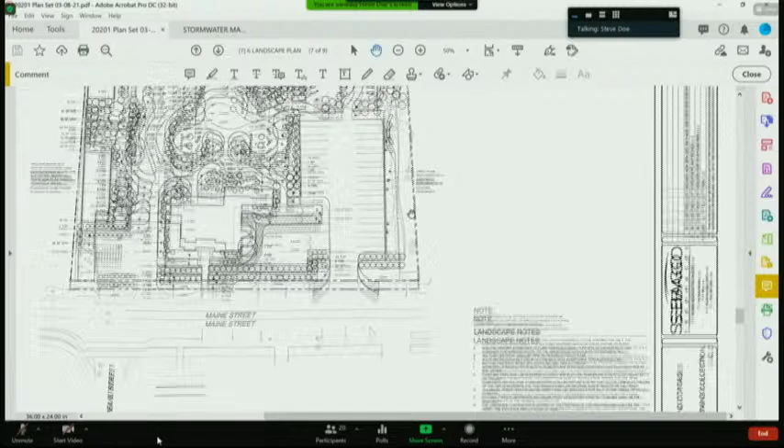This neighbor over here, I think, was also concerned about the parking lot. Currently, there's several large shade trees on this side. This one and this one are two very large Norway maples, or Norway spruces. Our original plan was to just keep the existing vegetation in there. If they have concerns about the views, I had talked to Rob, and he's willing to either add some additional screening, whether it's in vegetation or a fence.

I think if we put a fence in, we'd probably want it to run along this line just to the edge of the parking lot to screen those vehicles from their view.

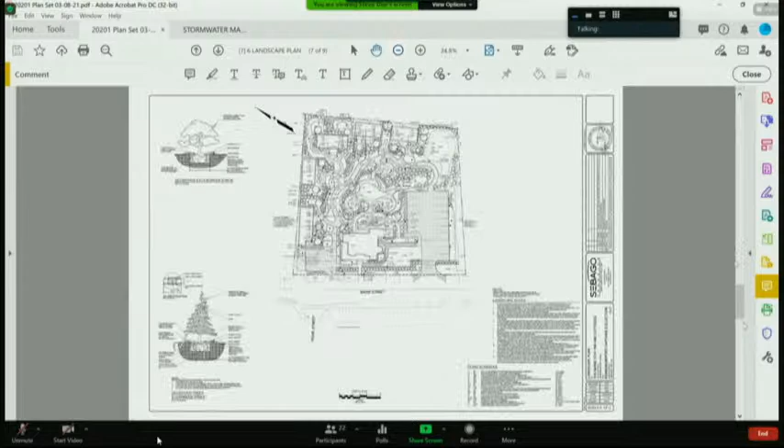The only other thing I want to discuss is our parking calculations, based on... I think I'll go to sheet 1. Zoom out a bit. The site plan has the parking counts.

So the parking count existing on site is 18 spaces. We're required 1 space per sleeping room. There are 17 sleeping rooms, so that's 17 spaces. 4 employees, which at 1 space per 2 employees equals 2. So we're required to have 19 spaces, and we don't have 19. We have 18, which is what's existing on site.

So we'd be asking for some leniency on that if we could keep the 18. To get to 18 would require additional tree removal, and we really would hate to do that. The only place we could add parking would be back in here, and there's some fairly large trees in this location. We really would not like to remove those if possible for that one additional space.

So that's all I have to update you. I'd be happy to answer any questions the board has, Steve, on this.

Steve, this is Ed. Can I jump in on the parking? You say that there are an existing 18 spaces, right? Correct. Didn't that include the street parking? It did not. Ah, okay.

I think there's an argument to be made here that as this is a grandfathered installation, the number of spaces that needs to be met is what was already there, not necessarily how many are calculated per the land use ordinance algorithm, if there's a difference between the two. You had 18 before, I think you need 18 now. So it would be listed as a non-compliance that's grandfathered, that they're not making any worse. That's what I would offer.

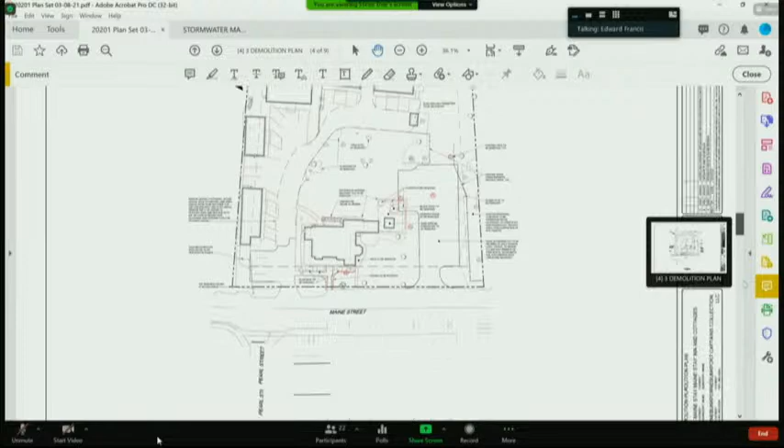Okay, my biggest question is item 7.7D: the total area of motel, hotel, bed and breakfast buildings, plus total area of parking spaces and driveways taken together shall not exceed 1/3 of the total area of the lot in the case of single-story buildings, nor exceed 1/4 of the area of the lot in the case of two-story buildings. Now, this is multi-story - the one building is multi-story.

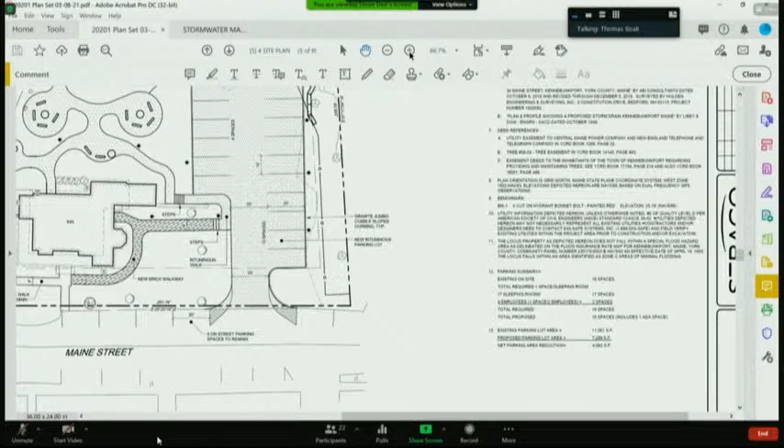So I believe it really depends on certain things, but I did some rough calculations, and I think the old version is using roughly 32% - that's my own just estimating it, okay? And your new one, depending on whether you count fire lanes as driveways and parking - if you count fire lanes as driveways and parking, you're over 40% and in trouble. So I guess I really need to see those numbers calculated from your plans, not from my fiddling around with a ruler.

So here's the numbers: existing parking area is 11,381. Proposed parking lot is 7,289. So there's a net reduction in the parking lot of 4,000 square feet. That does not count walkways, because walkways are not included in that. It specifically says parking, driveways and parking areas.

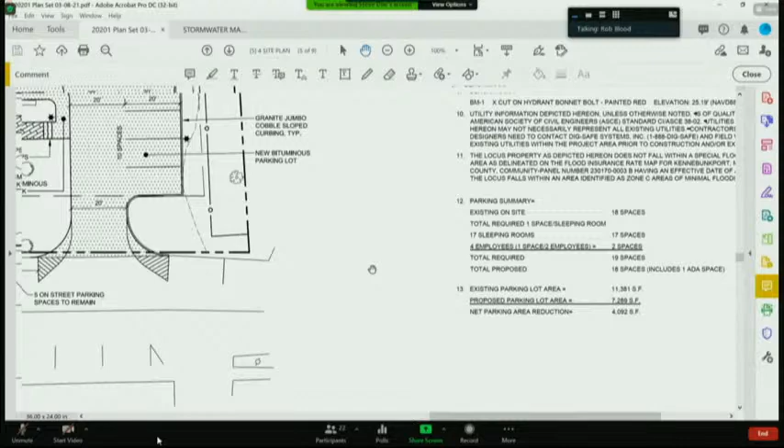Steve, the fire lane is planted, correct? Correct. Impervious or pervious? The only thing impervious is the footpath through that, so the rest is vegetated. So this is pervious here, but not the path. And I would not say that's a driveway - I would say that's a fire lane.

Fire lanes can be all grass in some instances. Okay, all right, so

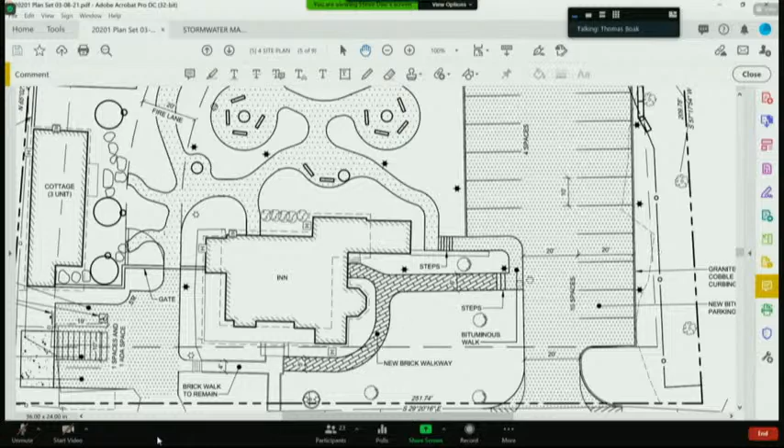You have the numbers, and what did you say the new number was on your parking lot? So the new number is 7,289 square feet. But you're talking about a reduction. Well, how is it as compared to the rest of the property itself? Because it may not have been conforming in the first place.

I don't know. Well, currently it's 11,381 square feet of parking. Right, that's there, not there. So he's making, I think you're reducing it, but how does it still compare to the overall non-conforming? You're making yourself less non-conforming. Correct.

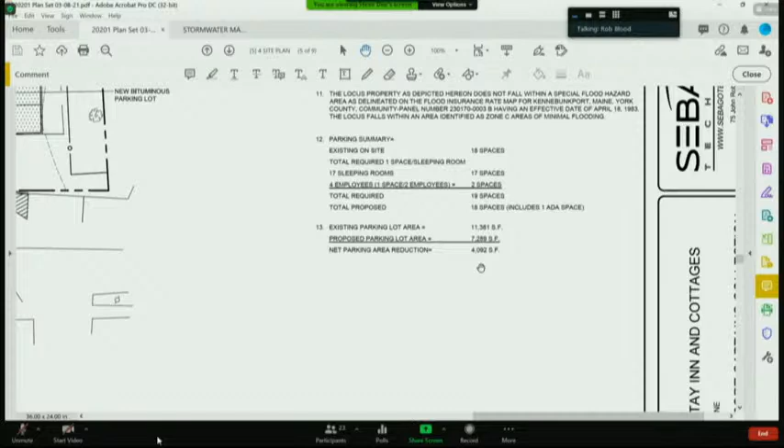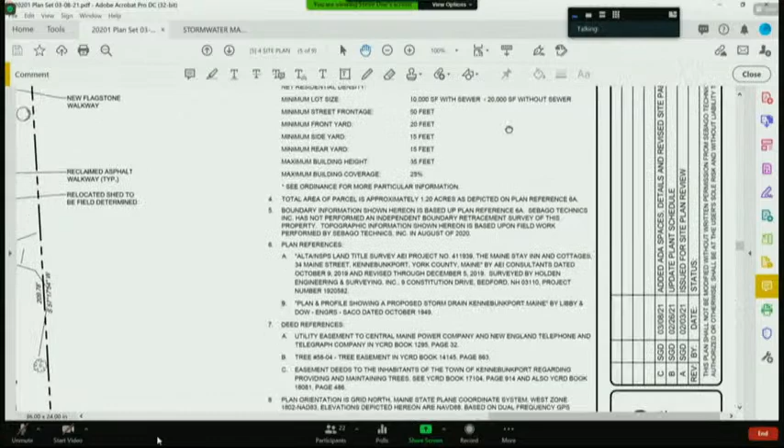Okay, what's the percentage, Steve? Do we know what's the lot versus coverage in terms of percentage coverage now? I don't think I have the buildings counted, so I really don't know what that is. 7289, you said somewhere. Thomas, do you know what the total coverage you had was in your calculation? My calculation, it was about 30%. But I didn't use his new number. I did notice that 7,200 number.

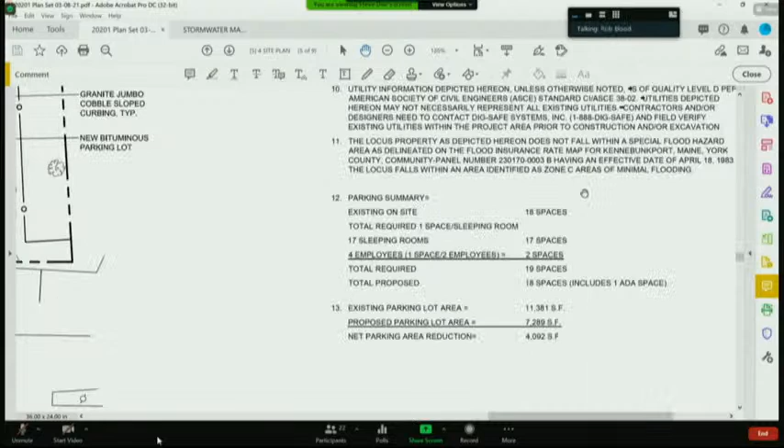And that's including the ADA space? If it's included in that number he just told me, yes. So it's better, but it's supposed to be 25%. It's another case of making it somewhat less non-compliant than it was to begin with, which is a good thing. But still not compliant.

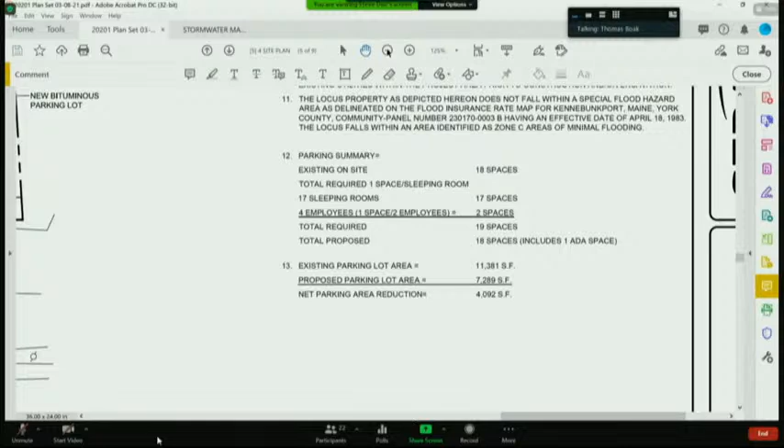Well, if you look at 7.7, it's supposed to have 40-foot boundaries around it, and it's got buildings right on the sidelines. So clearly it's non-compliant in a bunch of ways. But it's because they're making it less non-compliant, which is always the goal when working with plans like this. Yes, it is.

But we're going to document that. Scott will make sure that's carefully documented in the finding of facts, that it's still non-compliant, but less non-compliant. Okay, well, that was the main thing I wanted to go over. So, Nina, do you have anything?

Yeah, I have a couple of comments. When I first saw this plan, the fire pits bothered me. And so I went down to take a look at the site as I remembered it. And it was even more serious than I remembered it because this is a non-conforming use in a village residential area. And I have to agree with one of the abutters who wrote in and said that this could be very disconcerting to an abutter, and they're very close by.

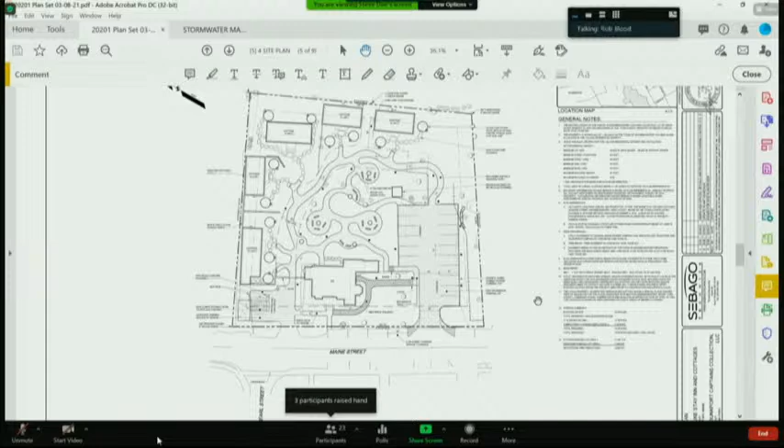We actually have fire pits at both Captain Fairfield Inn and Captain Lord Mansion, and we've never had any problem with neighbors or abutters. Okay, well, some of these abutters say that you might have a problem there. And you've got a lot of cabins there. You've got 5 cabins plus an inn.

Hey Nina, can I just clarify, to the point that there are fire pits at the other properties, I thought those were 1 or 2 centralized fire pits, more along the line of what you have in the center here. What Nina's describing is the proliferation of fire pits. I don't know how many are there in total?

Edward, so there would be 11 individual fire pits, one for each of the units in the cabins, and then 4 in the middle. And one of the things I'd like to point out to the board is that the maximum occupancy of this property is 34 people.

And my perspective on this, and I certainly respect that you may disagree, is that more creates less concentration and less central activity. So we purposefully placed 4 smaller fire pits in the center of the property so that we won't have large groups gathering around them, but we're creating small private conversation areas that are pretty well protected through vegetation and screening.

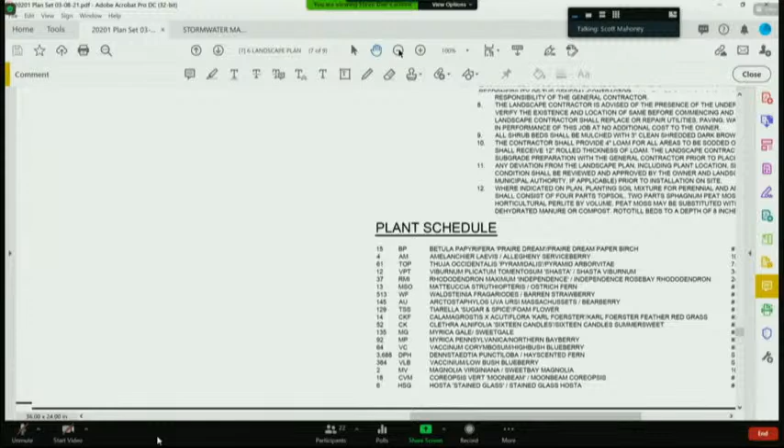The only thing you're going to see on Main Street is the entry to the parking lot. The rest will be screened by 10 to 12-foot arborvitae. Okay, and that's what I was asking about.

Excellent. Then how about along the wall, along the property line from Main Street, on the right side going back? Currently we don't have plantings, but as I talked about in my first presentation, because of the neighbor's concern, we could continue the arborvitae hedge down along that way, or we can put up a fence. I don't think they would like that too much. The first one sounds great. We're happy to add more natural screening there. I hope it appeases the neighbors, because it sounds like a beautiful fence in front and along that line.

Scott, may I just take a moment and talk a little bit about the fire pits, because I understand the concern. And also I want to talk about the nature of this property. Is that okay? Yeah, go.

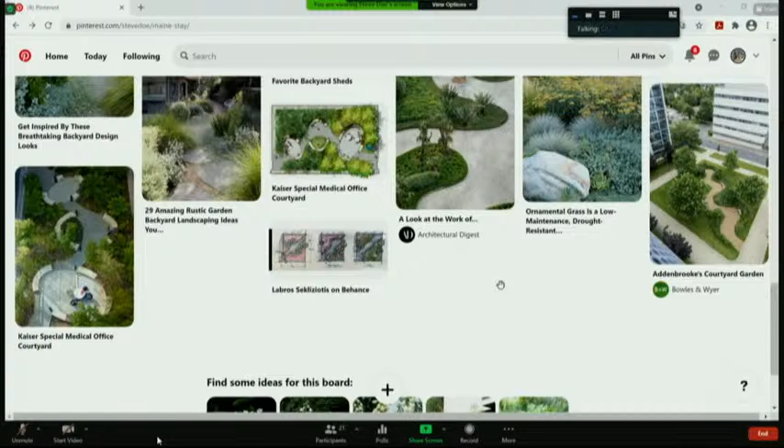It was important to me to understand and maybe visualize that the central ones would largely not be used by the people who were couples in their own little havens, but by the people in the main building, and maybe occasionally by two couples who came together. Again, why it seemed like 4 was overkill.

Guys, I'm going to be on the move in just a minute, I'm going to get back into the meeting on my phone. I just have another appointment soon, but I want to make sure I'm available to you as we continue, and especially available to Katie and the other neighbors as we get into the public forum. So I'll be right back. If I get on my phone, will you guys let me back in? No, we're going to keep you out. It wouldn't be terrible. But I'll talk to you in just a couple minutes. I'll be right back, thank you.

All right, so Larry, this is George, anything to say? Before you open up, I'm sorry, my connection cut off. Yes, I want to point out that part of the fire pit issue, raised by some of the residents, is currently, if I'm a guest there, my focus is inward, it's in my room, my cabin, my suite. What we're doing is taking people out of those and putting them all outdoors. From a residential expectation, I may now have 20 or 30 people sitting outside where I didn't have those people before. So that is a change in character.

Yes, but it's also very internal. You've got the cottages here blocking, so everything's internal to the site. We do have two back here on the backside of the cottage, but everything else is internal to the site. I appreciate your assurances, but I live across the street, 400 feet back from a motel, and as they've shifted their activities outwards, I hear it a lot more. I'm just pointing out, I understand the residents' concern. Gotcha.

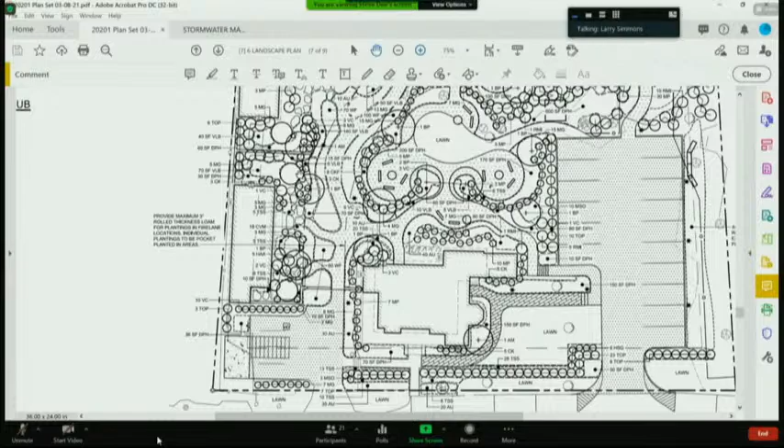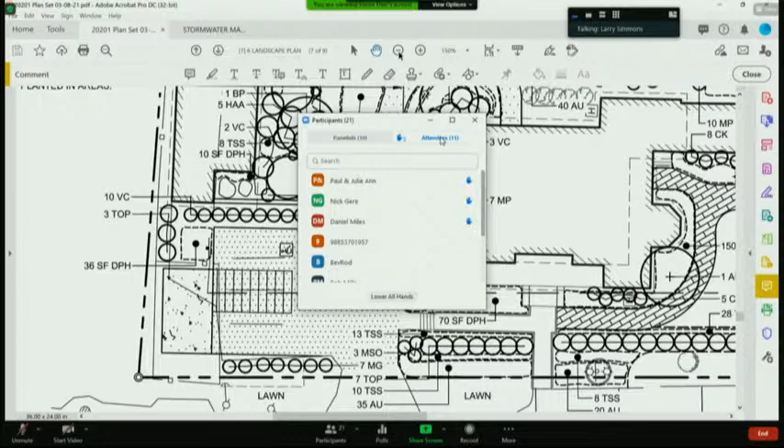Yes, I have. So the thought that occurred to me was, if you have that much area taken up, wouldn't you want just a little bistro table instead of a fire pit? And if you insisted on some sort of heating element, they've got a lot of variations of gas fires that go inside condo or apartment units you could adapt for this. So my thought is, to be honest, I'd prefer one or two central gas-fired fire pits instead of a whole bunch of distributed ones. I heard all the arguments about why they're so beneficial, but is this, when the renovation is over, still going to be just seasonal operation, or is it going to be operated year-round?

I believe the majority of it is seasonal. I think he said there may be a couple that are year-round, but the majority of them are seasonal.

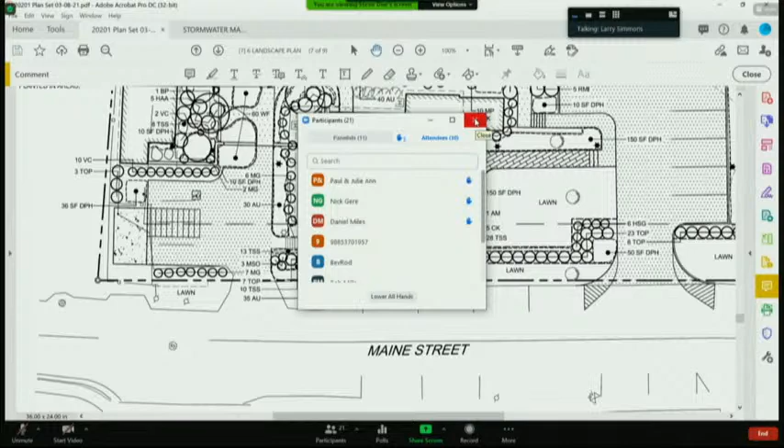Okay, so my thought there was, if it's going to be year-round operation, then the fire pit would be covered in snow in the winter, which would be less desirable, and that would enhance the idea that you might want an internal gas fire instead of an external one. Anyway, so the substitution of a bistro table for the individual gas fires was something that occurred to me, and then concentrating on a couple of communal gas fires in the middle. Which, I don't know who mentioned it, but the existence of a gas fire does tend to attract people, so it would be an opportunity for whoever's there to get together and talk to others. But anyway, that was my first thought: eliminate so many of the individual gas fires.

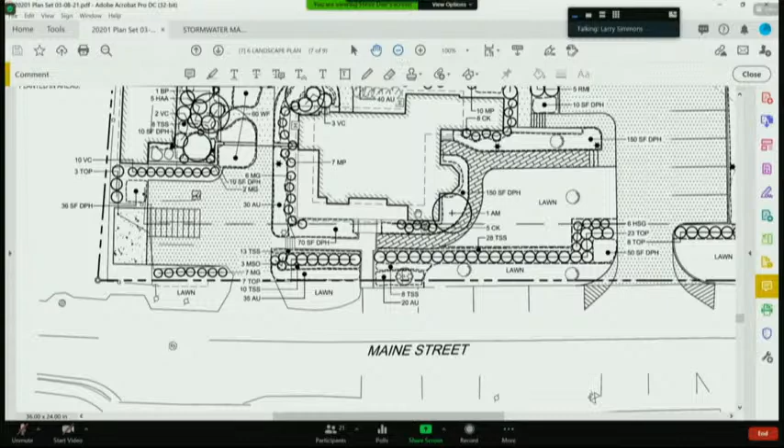So then my second thought kind of goes along with what Nina mentioned, that I have also walked by the site, and that is a big grassy expanse, and there's quite a significant depression below the road level. And so at the moment you're proposing to cover it with asphalt, right? The parking area? Correct. Okay, so that's sort of the default position. But I got all those letters from abutters who are sort of alarmed at the idea of, instead of looking at it green, they would be looking at asphalt.

So, it's just a thought, but is there any interest in substituting turf pavers for asphalt? Turf pavers are those concrete pavers that have a void in the middle where you can put some dirt and grow grass. So they still provide a parking area, but it retains some element of green grass. Did you want to think about the turf pavers?

Well, they don't perform well in the wintertime with plowing. They're going to plow it? Oh, but if it's seasonal, why would you plow it? Well, some of it's not seasonal, so if they have to plow part of that lot, it just doesn't perform well, those grass pavers. Okay. I thought that was a great idea. I love that, that would really be great for the trees. Yeah, well, but anyway, I do understand plowing it. Yeah, okay, all right, well, so you don't like that idea. So then I like it. I just don't see it being a practical solution. I don't think it'll perform well. It sounds good in theory, but I honestly think in the long term it's just going to...

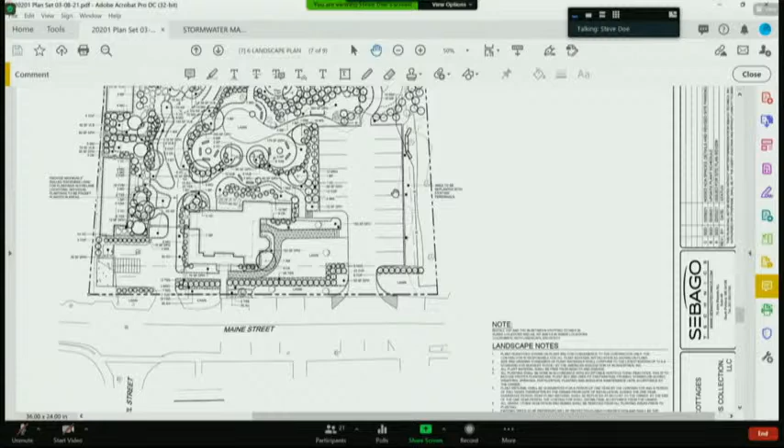You have to have grass there? Why can't you have gravel in between? It could be, I think it's still the same. It's still the same surface.

Larry, are you trying to solve the visual problem you perceive, or are you—Yeah, I was trying to solve the visual problem. But the other aspect to this, maybe certainly as important, is the jeopardy this parking lot might bring to the existing root system of the large trees.

Absolutely. In fact, that's my lead into my next suggestion, because I think both of those are germane. Yeah, and in fact, I'm glad you're going to meet with the Bartlett tree guy, because I have experience backfilling over tree roots, and the tree looks fine for about 5 years, then you have to cut it down because it's dead—it has a negative impact on the roots. So I'm actually concerned about filling that area to any significant extent.

Or excavating to any significant extent. I would say the neighbors would like the gravel look too—it looks very Maine.

Nina, could you comment on that? I mean, isn't being less impervious better so water does get down to those roots? I've seen trees start to struggle just because soil has elevated around them. Absolutely correct, I've seen it too. I've actually cut down some trees, not here, but elsewhere—changing things around a tree will kill it very fast.

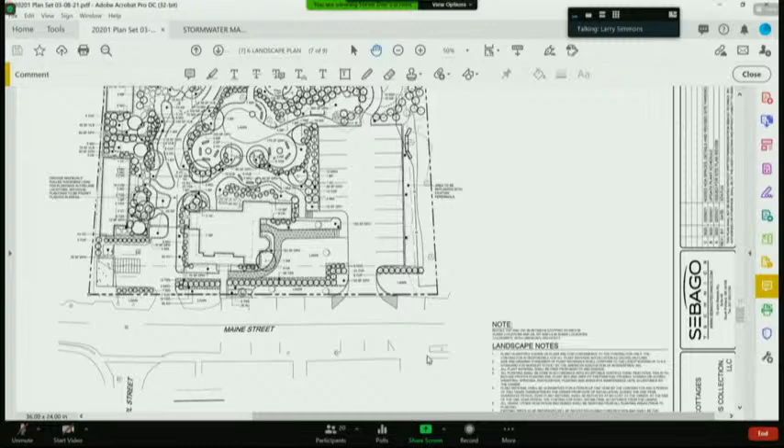So, this is just another thought in an attempt to assuage the visual aspects. I noticed that's a pretty big depression there—what's the change in grade from the road to the bottom of that area? It must be about 10 feet, huh? I don't think it's that far. It's pretty big, but it's not 10 feet. I don't know—there's numbers on there, 1, 2, 3, 4, 5 feet.

Would there be any interest in constructing—because you have a 5-foot elevation difference already—constructing some sort of a roof garden over the parking area, so that there would be an opportunity to preserve the appearance of greenery in that location? Of course, what I'm talking about would be some sort of piling with beams, with one-way slabs supporting some greenery. There are all sorts of designs that exist to make that work, but that would preserve the green visual appearance and would tend to reduce the need to plow so much. Of course, you wouldn't be able to run that all the way out to the road—you'd have to start it maybe halfway back, because you still have to park below the elevated greenery area. But anyway, that thought occurred to me as a way to retain the green image of that location.

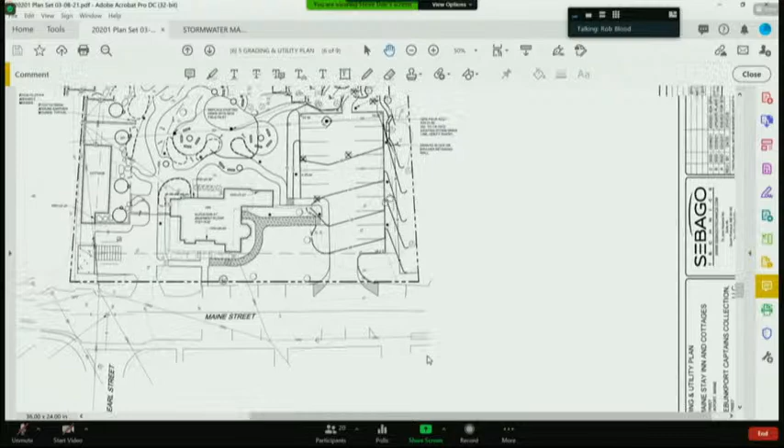One of the things I'd like to point out is that on one side of our property, currently on the left, you're looking at an asphalt driveway, and on the right you're looking at green space. Now we're just talking about flipping that, so we'll have the green space on the left and the asphalt driveway on the right. We're trading one for the other. As Steve pointed out earlier, we're shielding this with 10 to 12 foot arborvitae, and there will only be the small entrance of the parking lot that you're going to see once everything's planted.

So you're going to provide some arborvitae as a block, visual blockage of the parking lot. Exactly.

Okay, then looking at the plan, we were talking about snow plowing. Where's the area that you'll store the snow? Well, they would put the snow in this location here. And if it gets to a point where they don't have places to put it, they'll have to haul it off. But the intent is to push everything down at this location.

Okay, well those are my three thoughts. Just keep them in mind if you want to follow through on any of them. George, do you have anything else? No. Okay, John, we haven't heard from you yet.

I'm fine, I have one question. Piling up the snow in a big year at the end of the parking lot, what is that going to do to drainage? There's a drainage structure we got going right here, and then there's another one, I believe, right down here. So if there's anything in the parking lot, that'll be collected there. And like I said, there's another structure right here, so water can just run down to this structure.

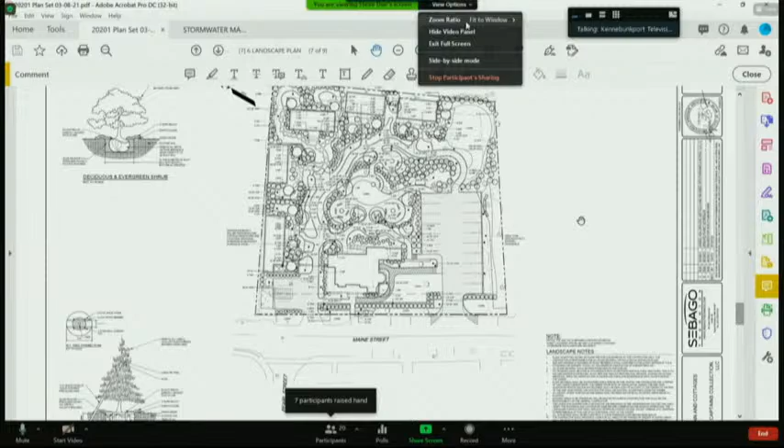We have lots of hands up. First, we have Paul and Julie Ann. You should be able to speak now, Paul and Julie Ann. Hey, can you hear me? Yes, identify yourselves please. My name is Paul and Julie Ann Labouve. We live right across from the Maine Stay Inn. Can you hear me? Yes, we can, go ahead. Oh great, thank you.

So there was a lot of great points brought up tonight, and I think Larry brought up a lot of really good points with regard to the fire pits. We're very concerned about those fire pits, because obviously we are directly across from where all those activities would be occurring. Right now, as it is, the situation is very controlled I would say, but in the future I just don't know where it's going to go. So my concern is really that the modifications to the property are going to increase the volume of conversation during the summer months.